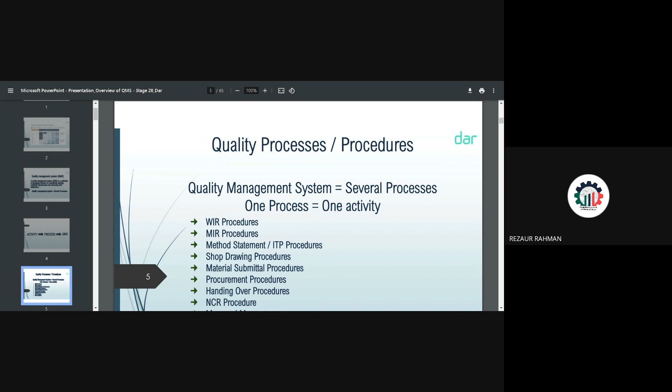Every activity should have a procedure. So to implement a process or activity as a quality management system, it's everybody's role to follow the standard template. We cannot make templates from our own mind or previous project experience; previous project templates are actually irrelevant. We must follow our specification, client, or project-specific template. I made a list: method statement, ITP, WIR, MIR, submittal template, letter, and minutes of meeting. Everything, including letters, should be according to the template.

Okay, next. This is not coming to, okay. I believe we can make it zoom.

Okay, concept of QA and QC. Do you have any idea what QA and QC are? What is the abbreviation, and what is the key meaning? Quality assurance is to assure the quality and prevent mistakes. Quality control is to discover mistakes. So the main thing is that quality assurance is to implement the process, like the method statement process or shop drawing process. QC means based on the product.

Okay, this is the project scope and location. If you see, there are a total of 11 locations across various areas in Al Ain. The scope, as mentioned here, includes road, potable water, storm water, sewers, street light, telecom, and power works - it's a small scope. Additionally, irrigation will be added as per other requirements. On the right side, the commencement date and number of villas are mentioned. I'll share the PDF copy with everybody so you'll get the detailed information.

Okay, next is the project location. What I found in the earlier sheet is that all 11 locations are in one sheet, and here each different location is shown separately.

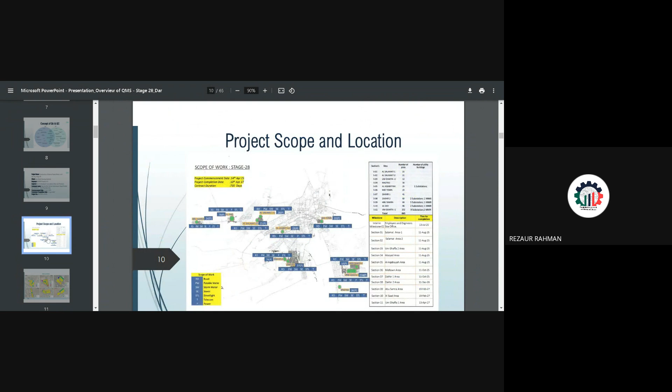And you know that for the quality management system, every standard company has to obtain certification from ISO 9001. ISO 9001 has a total of 10 clauses, and every word is meaningful. Companies implementing these requirements get the certification. Any standard company has to maintain this.

This quality management principle - every management system should have principles. Principle number one is customer focus, meaning client focus. In our case, it's ALDR. So what is ALDR or specification requirement? Our principle must be to implement or comply with the client requirements. That means if we achieve or obtain the client requirement, we are more customer focused.

Second is leadership. We should encourage leadership. Everybody should have the ability to lead the team. Engagement of people - any decision, anything, we should engage the people. We cannot decide alone. It should be engaged.

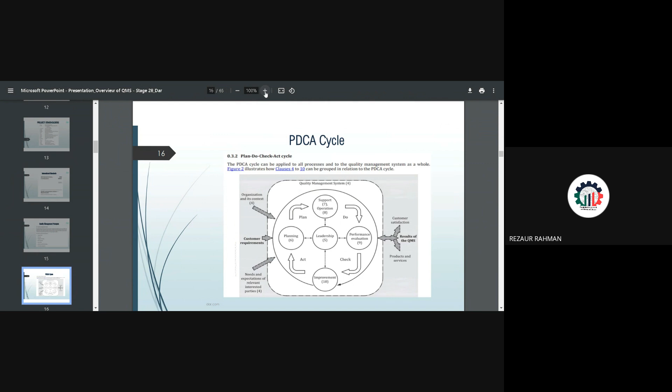So let me zoom in. What is PDCA actually? PDCA means Plan, Do, Check, Act cycle. What is the planning? This is planning, written planning. I will explain later on.

Do means what is being done at site, construction. And whatever the check - check means, for example, audit, WIR checking, MIR checking, any checking. Our review or shop drawing, everything is the evaluation. Last thing is that based on our comments, the contractor or project - are they implementing or not. If they're ignoring it, that means there is no improvement. I'll come to the detail.

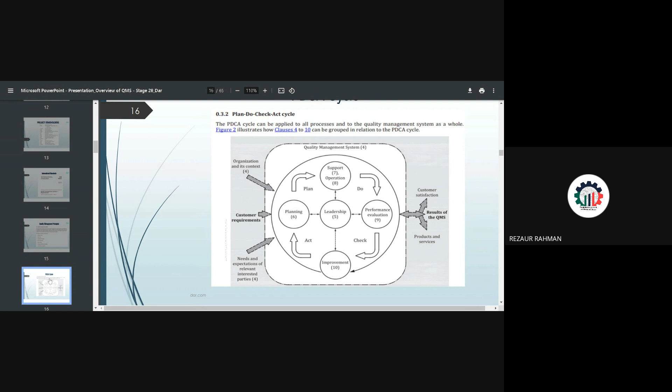Okay, PDCA cycle, first is planning, right? Planning is ISO clause number 6. So what is planning actually? Planning is numerous activities - number one is the project quality plan.

Everybody knows - have you heard about the project quality plan? Everybody heard about the project quality plan? Nasir, what is project quality plan? Okay, yeah, Abdullah. Nasir, yeah, Jafar Iqbal - what is project quality plan? Okay, so project quality plan, for example, when the contract project will start, the first activity or one of the first activities,

I can tell you, is for the quality department or the project to prepare the project quality plan. From the contractor side, the contractor will do it, and on the consultant side too. This plan will include all activities, what I told you, to improve the system - our goal is to improve the system. Contractor and consultant both - actually there are two plans. One is prepared by contractors, this should be implemented for the project, same like an agency plan. Another is the consultant should do it by himself, itself - this is only for the consultant, how to do it.

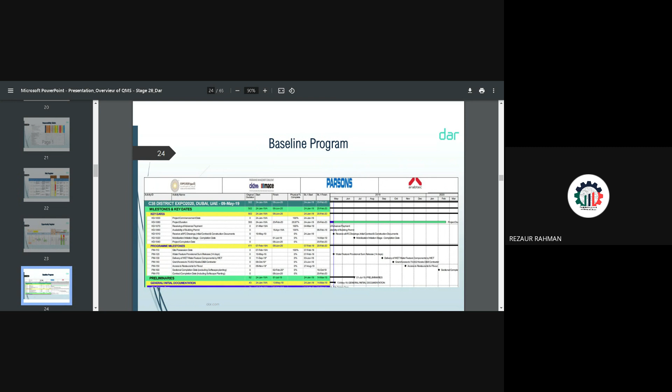This is a baseline program. Everybody know, I believe. Project key performance indicator - this is one of the fundamental requirements of the quality management system.

So key performance indicator, you have any idea? How do you know that this project is good, bad, or excellent? We know that our health is good, bad, or excellent, right? Even a project has health. So how do you know that our status is excellent? There is some criteria.

As a summary, for example, we have WIR. If our approval is more than 95% in first submission, that means it's good. If 50% rejection, there is a criteria clearly indicated. Extraordinary means more than 90. So WIR with more rejection means this project situation is not good.

NCR more, this project is not good. SR more, not good. Method statement rejection 40% rejection, shop drawing rejection. So overall, the total marks is 100.

Out of 100, you have appeared in class, right? In school, 100 marks - if you get 90, that means good student. If you get 40, that's a bad student, right? Similarly here, out of 100.

So yeah, Aisha, are you clear on everything? If anything, just ask. So this also is like the same thing.

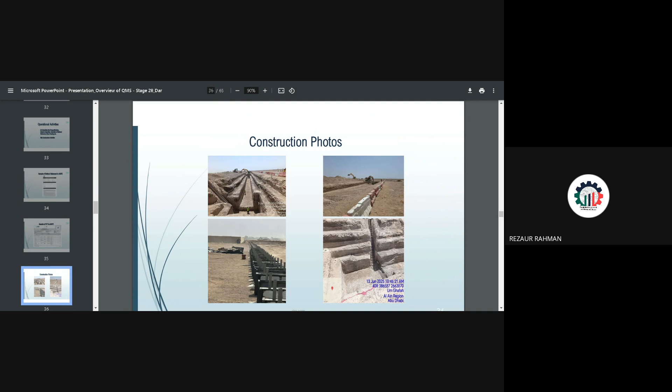Okay, now check - what is check? You are going for the material inspection, right, Hamza? Okay, so it is checking. Yes, Zafar Iqbal will go for WIR inspection. So you are part of the checking actually.

Okay, but performance checking - so the auditor will go for audit. Shehzad will go for inspection. So you are part of the checking. This is the most important - one of the most important.

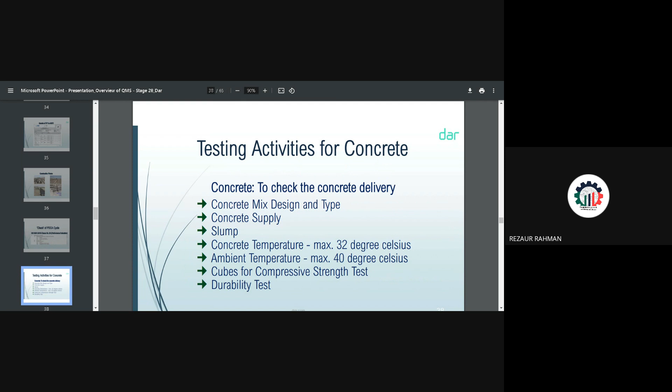We're coming there. Okay, testing - testing is the performance checking, right? If test is passed, that means the performance is good actually. If test is failed, that means the material or the work performance is not satisfactory. Testing for the soil - suitability and soil suitability tests we do. So it is part of performance checking.

Okay, then consultant - so initially they have to sign and submit. Then during inspection you have to do and attach. Checklist by the sign, then go to the site and verify all things. There are two columns - signature from contractor and consultant. But consultant signs after verification.

Next, tracking of WR. Have you heard about tracking of WR? This is very, very important. Shehzad, the tracking of WR - have you heard about tracking of WR?

No, not checking, tracking of the WR. You saw the ITP, right? For example, for one activity like potable water, five WR you have to submit. How will you know 5 WR need to be submitted? The contractor has experience - contractor comes for the last inspection and the previous inspection we don't know actually. We don't know - how to track?

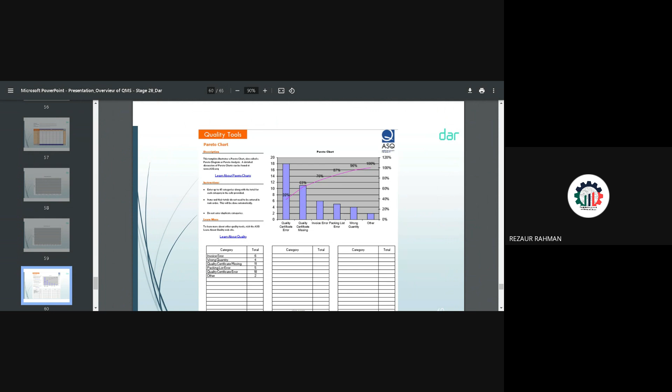Apart from that, always try to use AI. Which domain are you asking us to use AI in? For example, inspection or which domain? In civil engineering projects, it's not required in all areas. But for example, even for English, your English may be grammatically wrong. If you use AI, it will give you very standard English. If you send an email using AI, this is one example I'm telling you. A civil inspector in inspection, mostly AI may not do anything, but wherever you can, use AI. It will give you good improvement professionally.